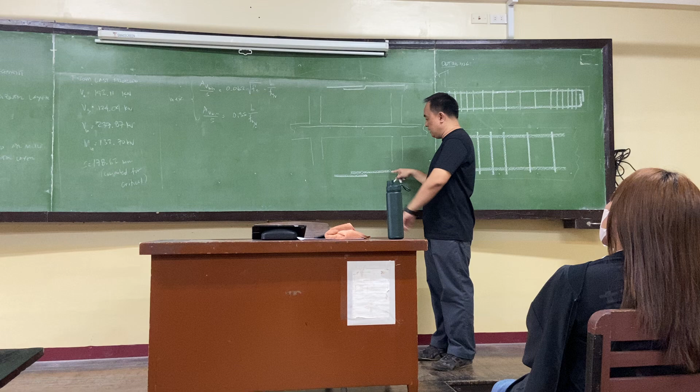So it's straight, that is to minimize the moment produced by this eccentricity here. It's small if it's not bent. The lapping should look like that. So there's eccentricity, such that when it bends, this will be in operation. So here, the force, so it introduces additional moment in your beam. So that's why in fabrication, what is done is the splice has a slight bend, so they press together, and then it's tied with wire.

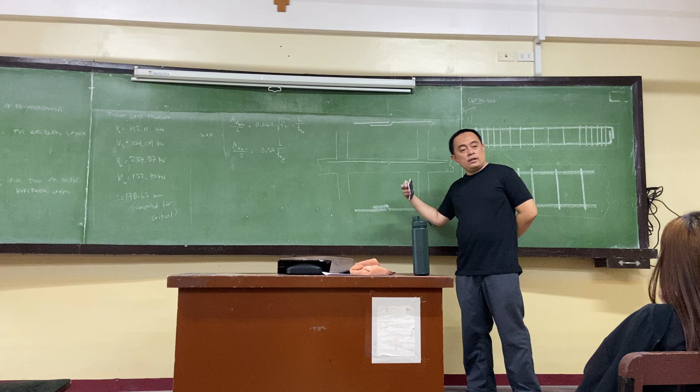What about welding, sir? That's one of the arguments of foremen, welding. Unless your rebars are weldable. Those green or red color combinations, those are your weldable ones. But in most cases, the commercially available ones are non-weldable, so you're only allowed to use GI wire. Okay?

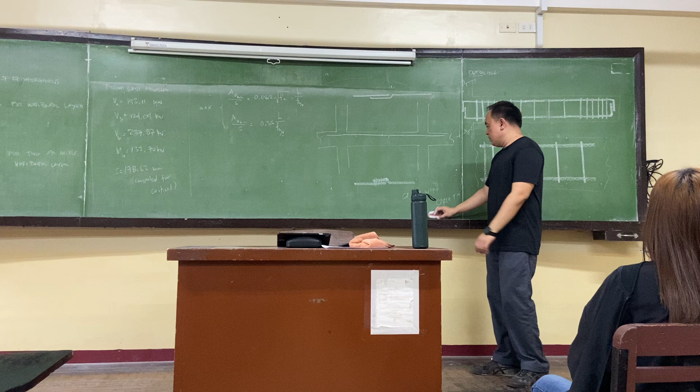So, going back. This is your top bar, and then our bottom bars should be continuous. If you really need to splice, you're only allowed to splice at the support. This should continue at a distance, I forgot the notation, but it's the development length. This is your development length. We are supposed to compute that but there's no time. But in our code there are minimum values dependent on the diameter size of your bars.

So what is development length? Your development length is basically the allowance so your rebars don't pull out when subjected to loading. When there's loading, of course it bends, and there's movement. If the length isn't enough, if the embedment is short, there's no proper anchorage of the rebars. So it pulls out and fails here. That's why you have what you call development length. Again, we won't go through it; I don't know if it's discussed.

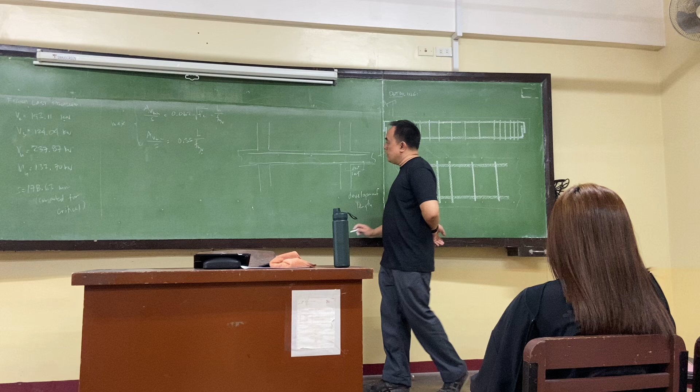In our case, the splicing is here for the bottom. When you're on site, don't allow any splicing in the bottom bars. Why? Basically, you have here a fully restrained beam. We idealize it as a fully restrained beam. And of course it's loaded by the slab and any live load. Just say the bending or deflection should look something like this.

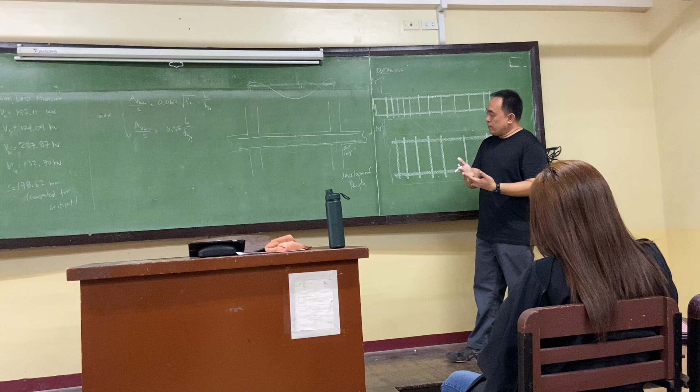That's the deflection. The positive moment is at the bottom. Where it deflects most, that's where the moment is large. So it will fail if it's spliced there. It will detach; since it's only tied with wire, there's a tendency to detach. So that's why splicing isn't allowed in the bottom bars. So this is your top bars, and this is your bottom bars. Technically, we call them compression bars and tension bars. Or in the case of a singly reinforced beam, the top bars are your hanger bars.

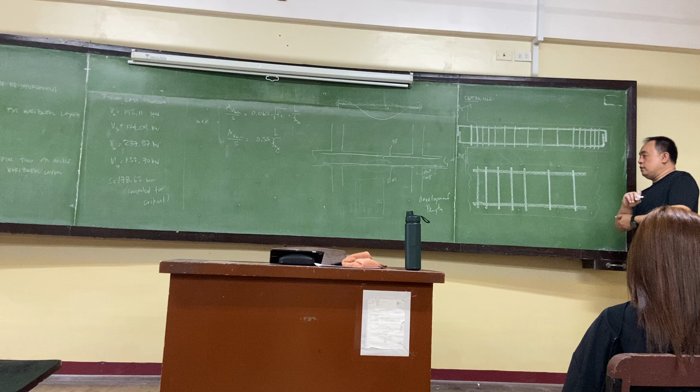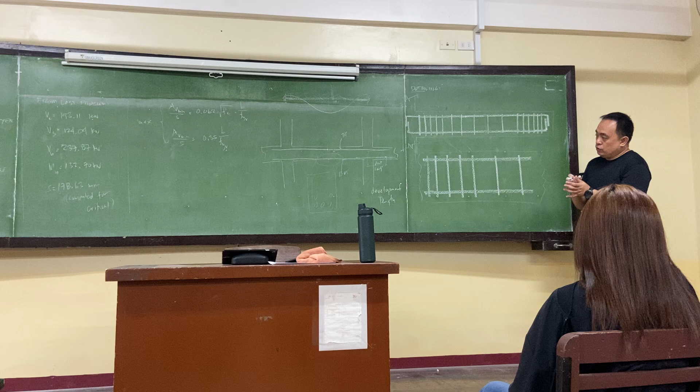And then placement of rebars, we'll discuss later how many pieces in a single layer, and when you need a double or triple layer. Usually, if possible, a single layer. But if there's no choice, you decide whether to make it doubly reinforced or have deeper beams, in which there are code provisions for deep beams. I forgot the ratio, but I think it's from 1.2.

This is 1 meter. So it's very deep, 1 meter tall. The problem with very deep beams is buckling, lateral buckling, and torsion.

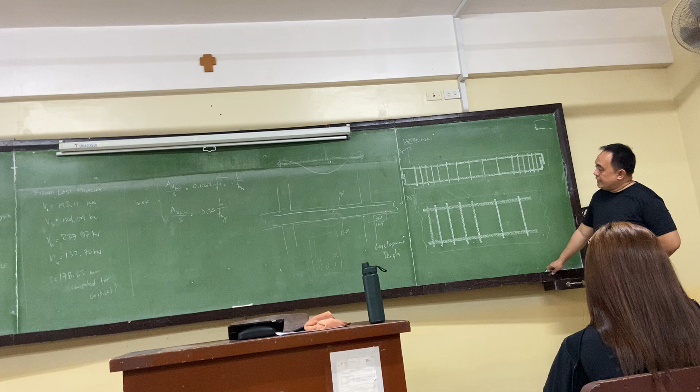Okay, and then, going back, typical detail for your beam is simply supported because somewhere here na anak siya extra sa among tawagod na extra bars. Technically speaking, there's no such thing as extra bar because we are designing our beam depende sa steel area. So kung atong area would dictate for us to use upat, let's say 16 mm, upat din ang atong iputan niya. And of course the hanger bar is the same diameter as our main bar here.

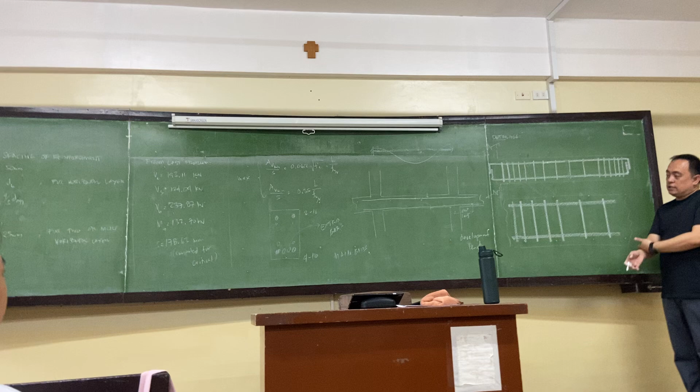So what happens there is, in your deflection diagram, on the average, that's your L over 4 there. What happened? Over 2? Yes, sir. Okay. So what happens there, kanala yung mga extra, if your rebars, let's say for example, sa support, mapaliman niya siya later sa mid-span. That's why if you look at the structural plans, structural drawings, you will have something like at support. Sa beam, at support.

So you will have, let's say, 5 ka 16. And then sa hanger niya is 16. Okay. So, at support. Pag abot ka sa mid-span, that will be reversed, because mabaliktad man ang orientation sa atong tension. So, this is a mid-span. And then this one here should be visible sa kilid. Wala nang ilang itawag na extra bar.

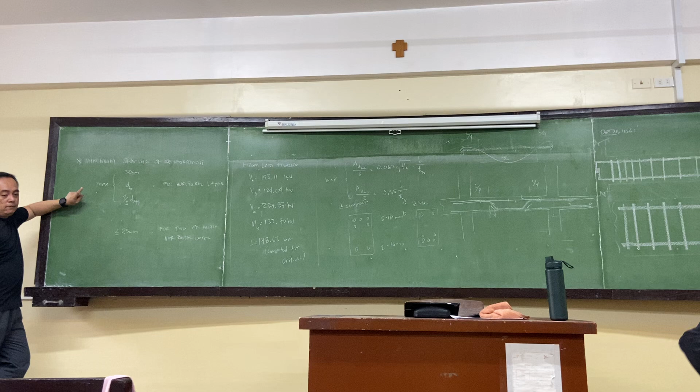So, how do we position our horizontal bars or our main bars? So, we have here the spacing. So, 50 mm guys. No, dito siya 25 or 25 mm. Okay? Specify nito. So, 50 dahil siya. So, 50 mm is 2 inches.

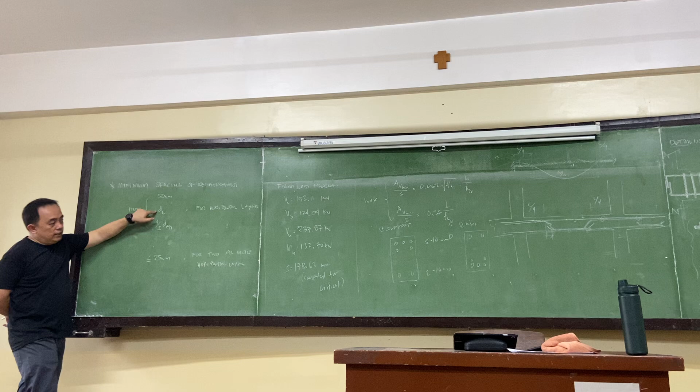Yeah, may nasa code, no? Pero ako nandaan is 50 naman. But I will just have to clarify how the provision is. So, it's 50 or the diameter of your bar, or the 4/3 of the diameter of your aggregates. Usually your aggregates is 3/4 inches, usually for beams. So whatever the biggest value is should be the spacing of your rebars here.

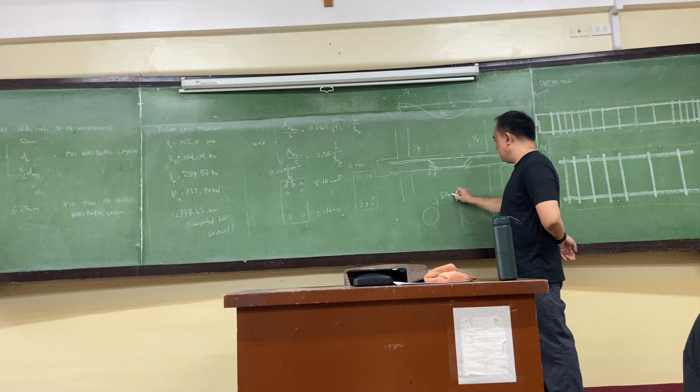So let me just check kung clear spacing ba din siya. Clear spacing is, if this is your diameter of your rebars, it's not the center, so it should be this one here. Anyway, code 50 and then for the diameter, let's say for example 16 mm. And you're using 3/4, so times 4/3 of that is 1 inch. 1 inch is 25.4 mm, so you are stuck with 25 or 26.

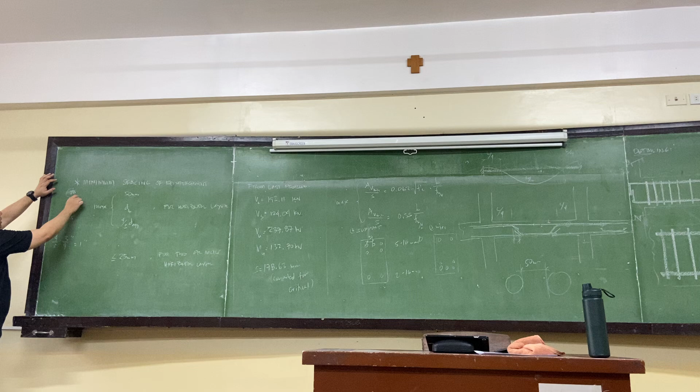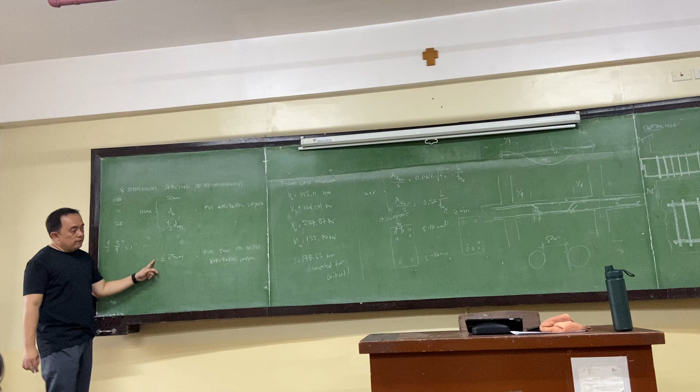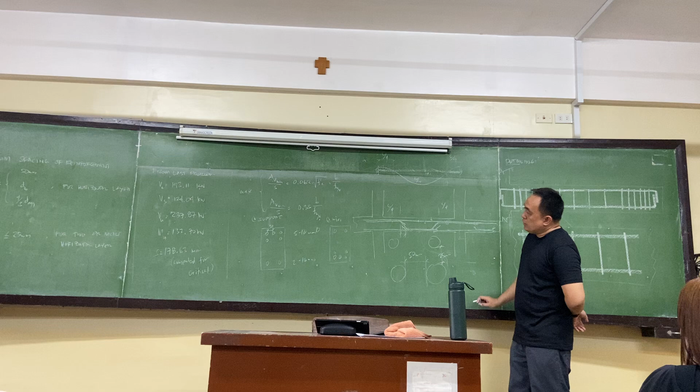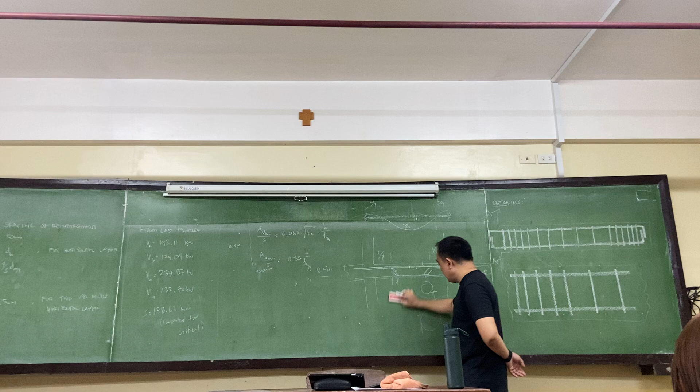The biggest of the three should be the spacing for your rebars, so dapat 50 na spacing. If it's necessary for you to have a dual layer or multiple layers of rebars, the spacing of that should not be less than 25 mm. That's the clear spacing also, for bars, main bars in a parallel direction.

So let's try, no? That was the last problem. If I can remember it right, 2 ka 20 mm bars. And then the width is 400. 600 ang height. 2 by 20 or 3 by 20. 10 ang stirrup. Okay, it should be like that.

So 400 mm. By the way, we also have a provision in the NSCP for our minimum cover. It says there if exposed to weather or in contact with ground, for walls, all other, we have 40 mm. It's actually table 420.

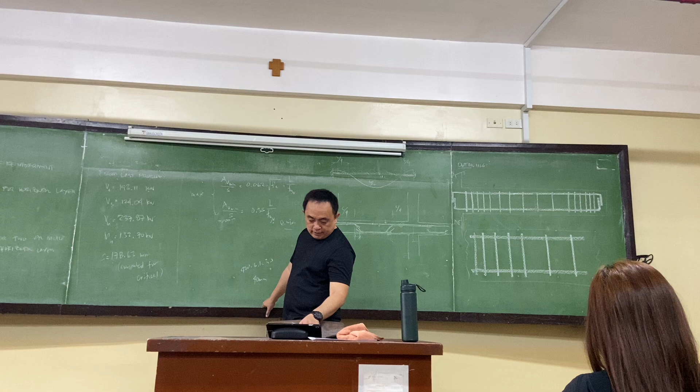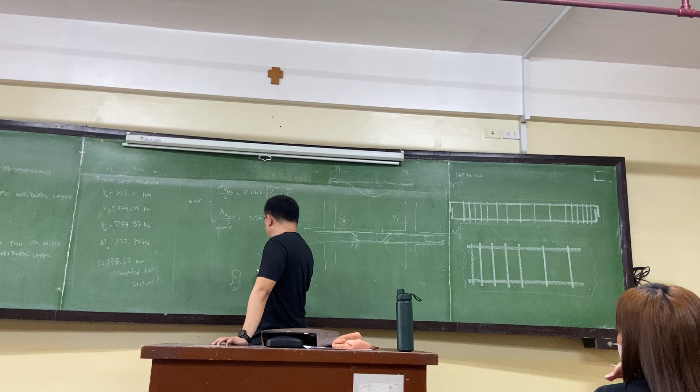Okay, and if it's in contact with the ground, it says 50; we're using 75. But anyway, it's 40 for the cover. So, 20 mm, no? 20. And then we also have 50 for the clear spacing. This one is 20. This one is 50. This one is 20. And then a 10 mm stirrup on each side. 10 and then another 40 mm for the cover.

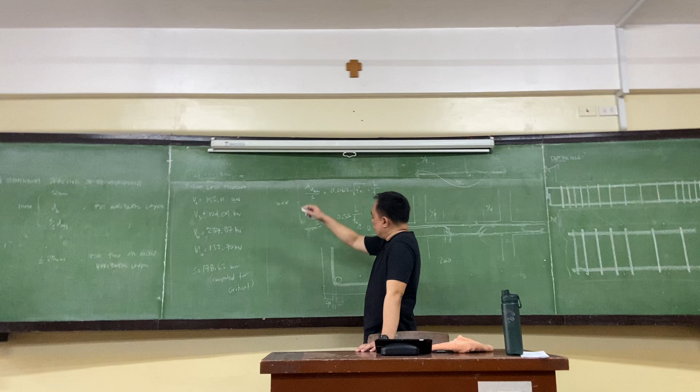This is our beam, the surface of our beam. And then we will have our stirrup here. This one is 40. This one here is 10. And then your first bar there, which is 20. And then it's just the same. Of course, three of them. So the idea is one is at the center, and then the corners, and then up there should be the hanger bars. Okay, here is 40. This one here is 10. And another 20.

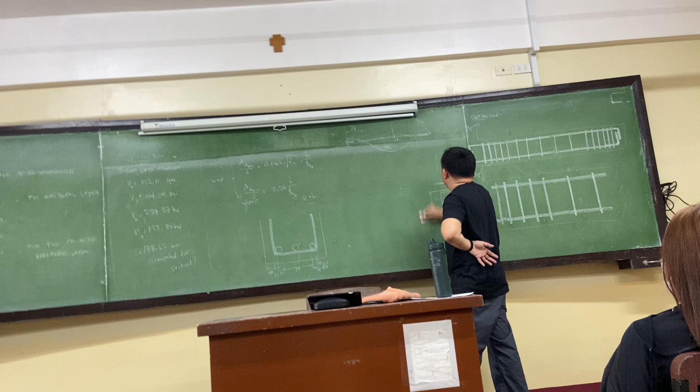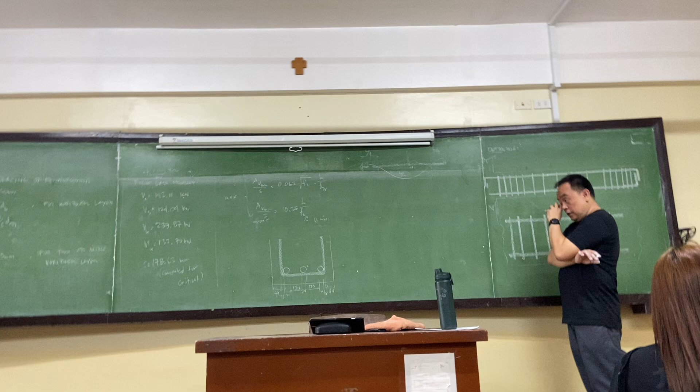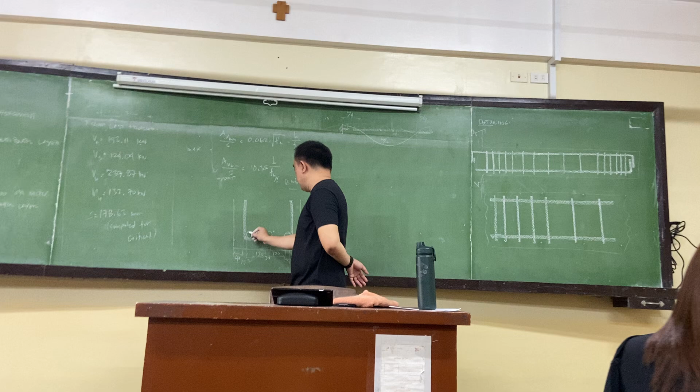For me, it's fine. I think it will depend on the engineer. It will depend on the specifications, because the architect wants 400 mm. So for me, I think I'd go with 3 bars. So you have to balance those things out. Okay? So I guess that's it. So for the detailing for the main part, you should have something like this. And then of course your d should be the height minus the cover and so on.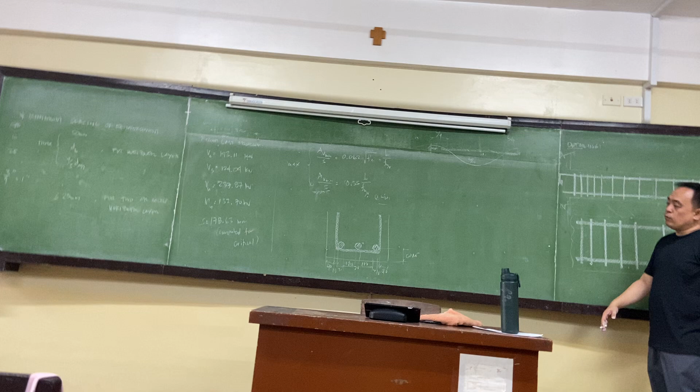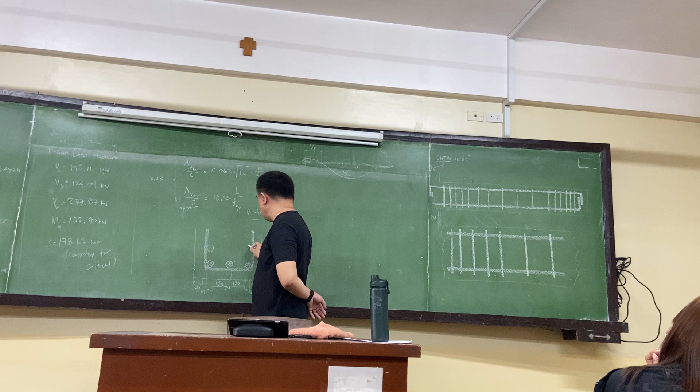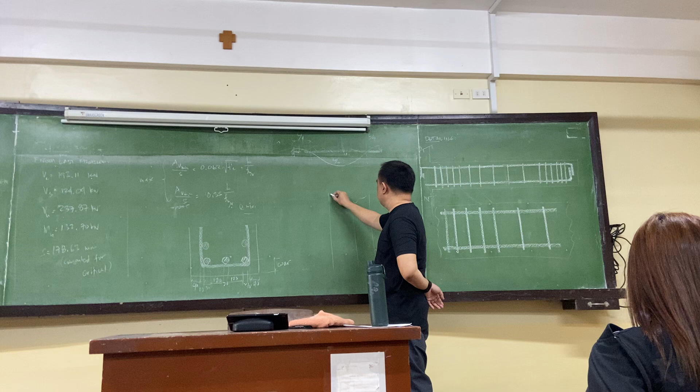Now the issue is what if you're forced to use two layers? And this is almost always the case, because sometimes the problem is at the center. What happens in reality on site: for example, this is your column. Your columns will also have some rebars there at the center. Now, the columns are fabricated or constructed first. So whatever the reinforcing there, the beam should adjust as much as possible. But there are cases in which it can't. That's sometimes the case on site.

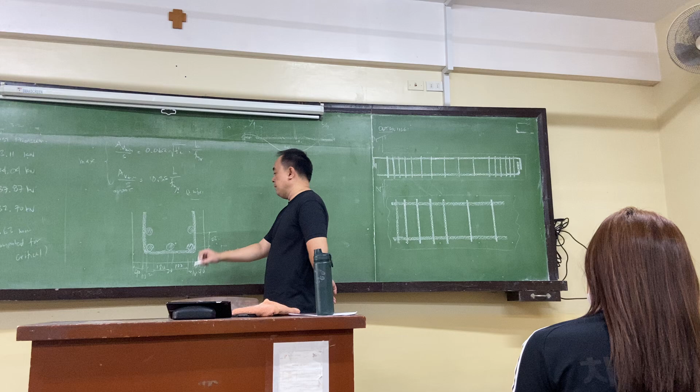So let's say for example you're forced to do two layers. According to the code, this should not be less than 25 mm. Okay? Now what happens to your d? Theoretically speaking, your d is to the centroid of your first layer. That will change if there are more bars on the side. So that will change if it looks something like that.

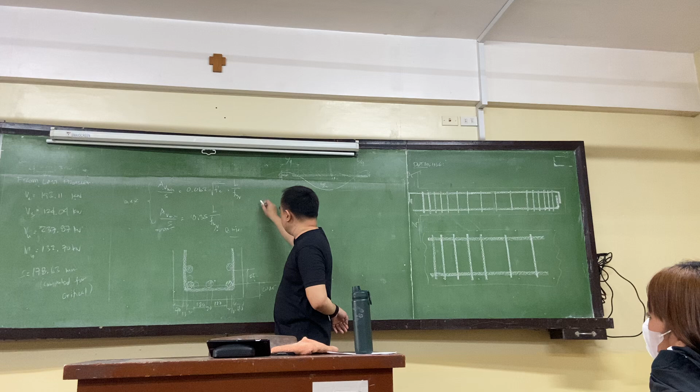Besides that, you also have a case of bundled bars, so you will be forced to bundle, right? Bundling the rebars is allowed, up to three if I remember right. Okay. So it will change the centroid of your rebars. So how do you compensate for that? Notice that the capacity of your